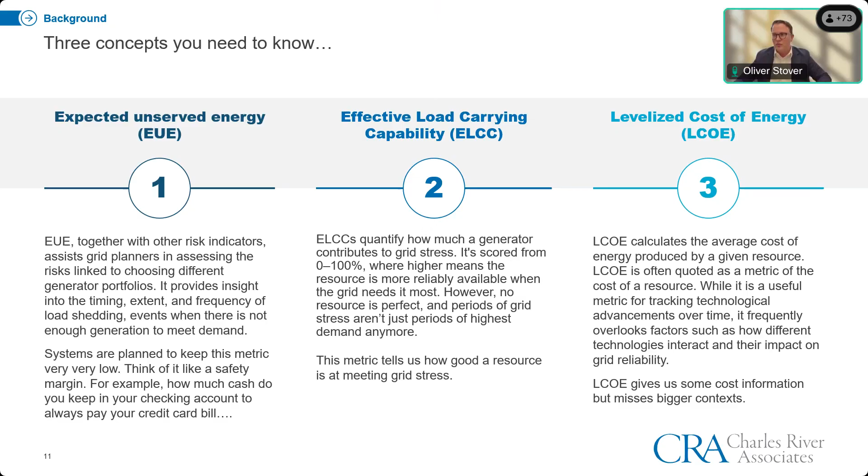Moving forward, the first thing we did when we performed our analysis is we wanted to just look around and see what public information was out there so that we could understand some of the New York dynamics when we looked at some of these challenges, especially the resource adequacy challenges facing the New York grid. So there's been some great work done by the New York ISO, if we look on the next slide, looking at some of the emerging challenges facing New York. And they have raised some concerns, along with many other markets across the country, that we're starting to see that uptick in reliability risks and that increasing risk toward winter.

So specifically, they've said, okay, starting in the 2030s, we're concerned about elevated load shedding, and we're really starting to see that risk profile shift toward the winter. And some key things that have been highlighted in New York studies, which have all been quite informative, is not only are we getting stressed, our neighbors on which we really benefited from trading with are also getting stressed. And specifically, most of the stress is overwhelmingly concentrated in New York City, as well as Long Island. So that's kind of the first data point that we looked at.

And when we looked at why New York was saying this, and jumping into the next slide, some of the concerns that were being raised as they did these studies is they specifically highlighted, well, New York kind of has a mismatch: a lot of the ability to build generation is upstate, versus all the load is concentrated downstate. And it can be hard to put new generating resources into those, especially urban congested zones.

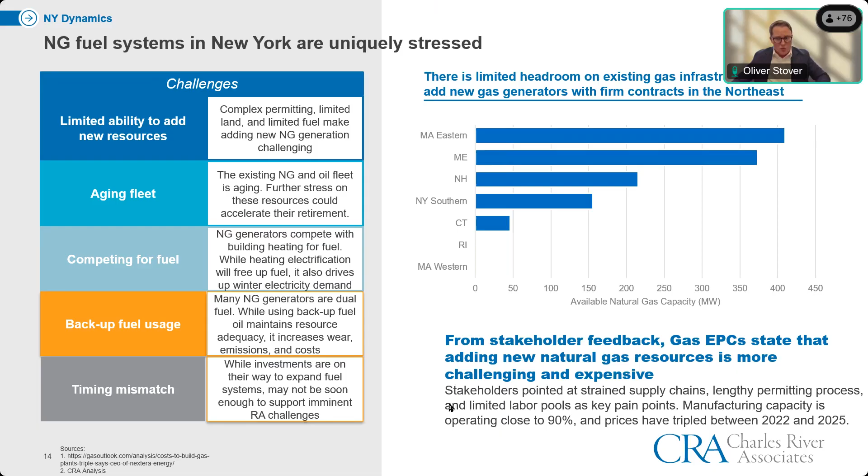We also looked at, if we go to the next slide, how is offshore wind being used in New York now? And we were able to evaluate South Fork Wind as an interesting case study to see how this has gone and how this resource has been used to harden and resolve resource adequacy challenges. Some themes that stood out to us: this is a relatively small system, somewhat isolated because it's on Long Island, and was recognized as having transmission constraints as well as fuel constraints. So it's this little pocket that's just a little bit hard to deliver to. So when the Long Island Power Authority put out a request to solve some of these issues, they specifically identified that this needs to be either a fuel-free resource or it needs to have liquid backup fuel because of some of the challenges delivering fuel to the system.

And that's how we've seen the offshore wind resource specifically here be used as this targeted intervention to solve some of these local problems and harden the existing infrastructure that was already there. This has been a consistent theme in the remainder of our work of the potential of how offshore wind can be used to resolve resource adequacy challenges, not necessarily purely as a replacement for existing infrastructure, but as a way to harden and augment existing infrastructure and get ahead of some of these fuel deliverability challenges.

The other thing that stood out to us is that this has a pretty decent capacity factor, 46%, quite high, especially when compared to other resources like solar. Certainly recognizing that it's a variable resource. They can't control when the wind blows, but when it does blow, it blows quite often, and specifically it blows often in the winter, which is a great way to harden and meet some of this winter stress.

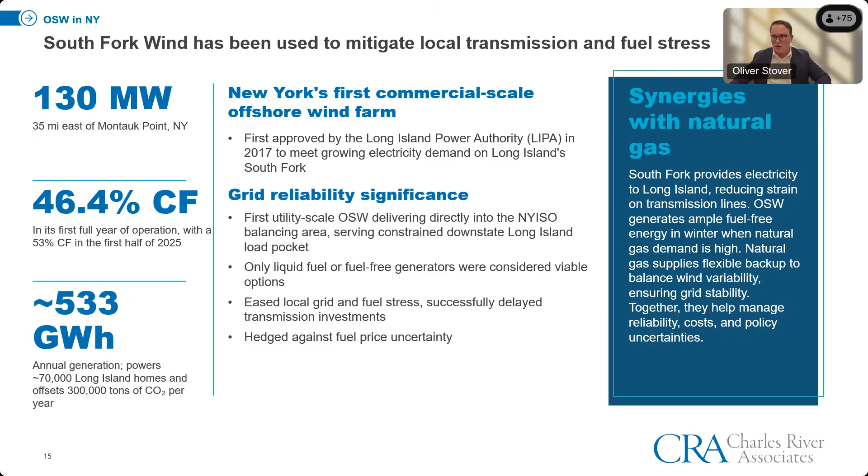The next thing we looked at on the next slide is, okay, what is the timing of the offshore wind and how could it potentially play a role? So what we found was that Atlantic-based offshore wind has this profile of quite high generation in the winter months with still material output in the summer, but a dip. We also found that because offshore wind can access higher wind, they're often taller, and they have the benefit of those coastal steady breezes, they often have quite a material benefit compared to their onshore alternatives.

And we also looked at how this benefit profile compares to, say, natural gas, recognizing that with some of our modeling capability, we can capture that natural gas has a temperature-dependent outage rate that's recognized nationwide and faces stress in getting fuel or has a slightly elevated outage when it's quite cold.

When we compared these three resources, the synergies were quite obvious to us. Natural gas had quite a bit of availability more in the summer and was able to meet some of those summer needs, while both onshore and offshore wind were the perfect augment, in that they had their periods of greater output during that winter when the natural gas system was more pressured, as well as being able to use the natural gas system to fill in any of those short gaps we saw in the winter.

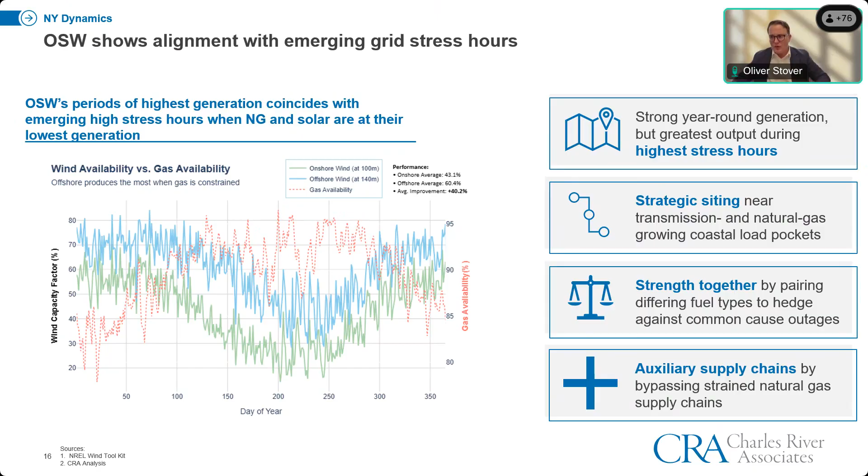Next, we wanted to really dive into what the markets are saying, especially in New York and New England. So specifically, we look through the lens of ELCC.

If we go to the next slide, that's that metric, that 0 to 100 metric, where the market is saying, okay, this is how much I think this resource can help me in solving grid stress. What this means is it's sort of saying, okay, this resource is, say, 100 megawatts, but I can count on maybe 10% of it in those grid stress, so I'm going to count it as a 10% resource if I theoretically replaced it with a perfect resource.

These are quite complex calculations, and especially for those motivated, it's worth spending time to understand them. But I'll leave this to kind of the A+ students. The key thing to know is that what an ELCC means is how much would this resource perform when compared to a perfect resource, specifically with solving grid stress.

they basically have said, well, now solar's done it. I'm able to generate during that period of time. I can meet demand. Okay, I've charged a storage resource. It discharges after the sun sets. And I've been able to solve it and really effectively help meet those historic periods of need. But now I've kind of shifted the problem later in the day.

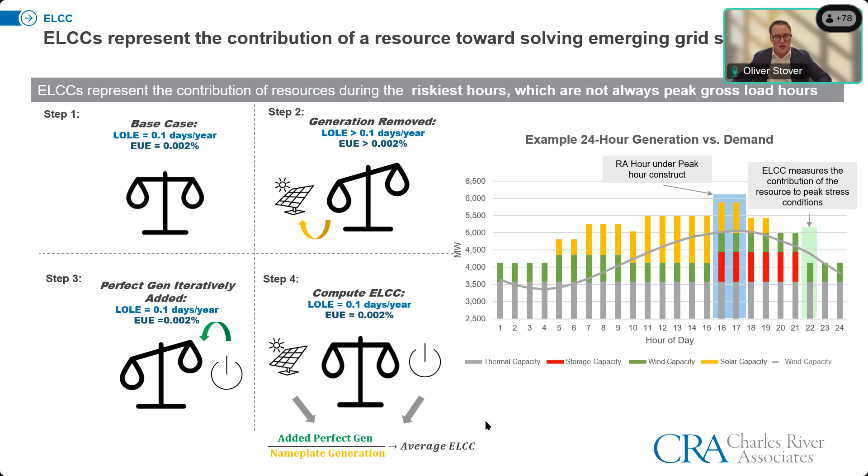When we actually looked at what the markets are telling us, if we kind of go on the next slide, New York's market, as it's put out its ELCC numbers, has increasingly said that offshore wind wins among renewables. This makes sense. It's got a higher capacity factor, it's got greater generation over all years, as well as that kind of key winter contribution.

However, of note, New York ISO is still evolving its ELCC accreditation. It's still a work in progress. And one of the things that they're fully working to capture is that stress on fuel systems, which is increasingly becoming a factor as folks are understanding stress.

So if we move to the next slide and look at what do other markets tell us and kind of what's the signal being put out there for offshore wind. ISO New England does do a really good job of capturing that fuel stress and can give us that more deep dive information of how offshore wind does and how it compares not only to other renewables, but more traditional generating resources.

And they also do something interesting where they look at multiple snapshots in the future and they say, not only at this level of offshore wind, but at a range of outcomes, what could happen. So they looked at 3 futures, one with quite high offshore wind investment and one with lower. And the things that stand out to us is that first tranche of investment in offshore wind is incredibly effective.

Its ELCC is quite high, and in fact, comparable even to a gas resource because it's really slotting in that period of stress. Even when the gas resources are stressed, because that's when offshore wind is quite effective, its ELCC is high. However, it shows that as we invest more and more, offshore wind, similar to solar, kind of becomes a victim of its own success.

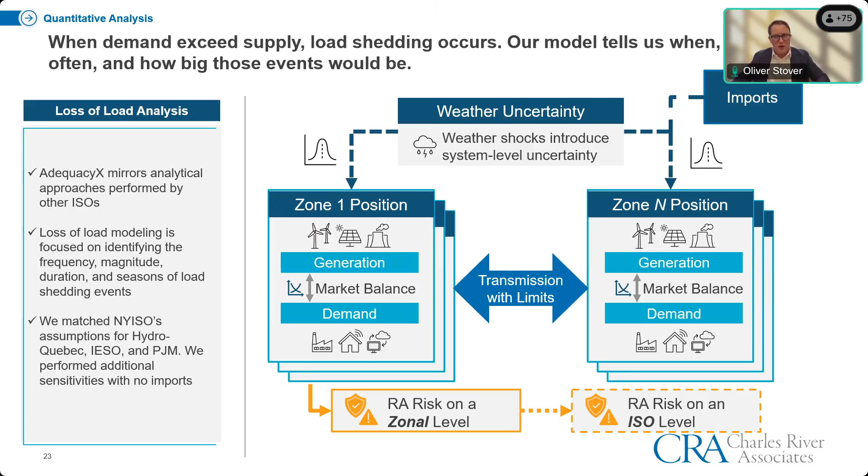And the next thing we did is we also tried to compare offshore wind to other technologies. We recognize on the next slide that it's not as simple as just saying, I'm going to pick this resource. It's really more saying, I'm going to pick this resource, but I could have also picked these resources, and understanding what role it plays and how it compares to its peers. And we hope to give information to help policymakers understand how these technologies play in a New York context and what is the right balance of resources that can help meet some of the emerging needs.

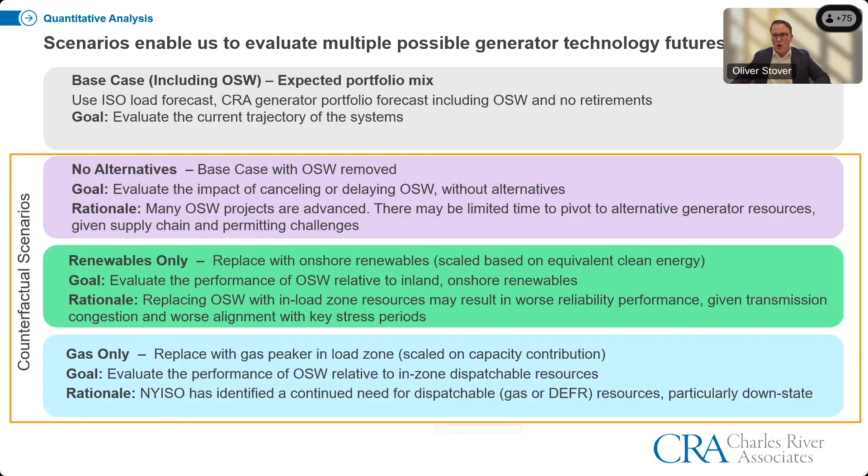When we actually got into our results on the next slide, one of the first things we looked at was potentially some of the stress on the fuel systems, recognizing that this is a key risk in the region, and how offshore wind could potentially help with some of these challenges. So we took New York ISO's load profile and added in electrification of heating and EVs, a critical part of what we recognize is happening in the future that New York ISO is projecting. And we looked at how much more stress this would place on the use of oil-fired resources.

While this is not a traditional risk metric, we think this is an important factor because using oil has a number of negative outcomes. Number one, it's more expensive than fuel-free resources or natural gas. Second, it increases the burden on your units. Dual-fuel generators are very reliable, it's a very effective strategy, but there is that slight uptick in wear and tear on the resources. So if we're running them more and more on oil, it could cause increased stress in the units, perhaps causing faster retirement than we would like for some of these aging resources.

There's also an emissions factor. These are higher emission fuels, so we want to understand that context. And lastly, there's a reliability factor. These often have limited storage on site, and as soon as they flip to that oil resource, the generator is asking to get refueled from trucks. So if we're on oil for a long period of time, it could create strain on the system across the board, as well as logistic headaches as I try to refuel that system.

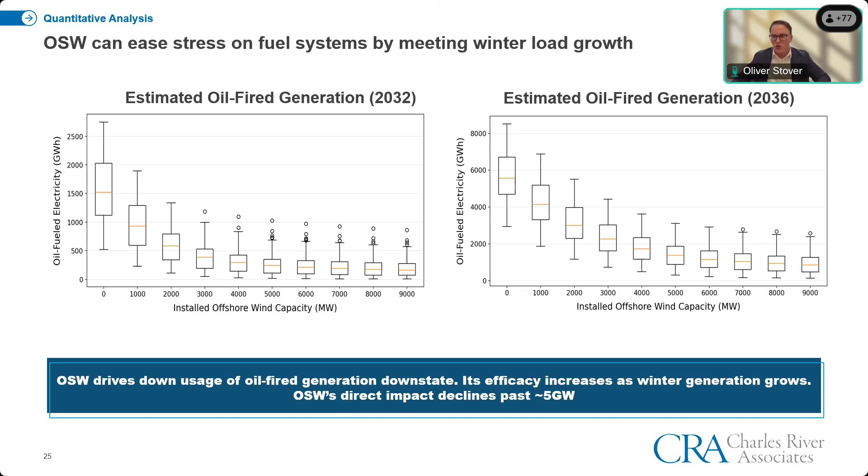We also very clearly see that declining benefit as well. That first tranche of investment is very effective. It really is the most effective per megawatt at driving down oil usage, and it starts to decline over time. We see a tipping point at about 4 or 5 gigawatts, well beyond the current tranche of investment, but perhaps important information as we look at how much of this resource makes sense, as well as the ability to pair it with other resources like storage so that it continues to have benefits beyond that initial tranche of investment.

The next thing we wanted to look at is how well offshore wind does compared to other technologies from a reliability perspective. The way to read these graphics is I looked at my 4 scenarios. Base case, current technology projection with offshore wind. No alternatives: what if I just canceled the wind plants and didn't build anything to replace them? Renewables only: what if I built only onshore renewables but put them out in New York, recognizing that I can't build an onshore wind plant in New York City? Or what if I replaced it with a gas plant within the downstate region? And we did this for 2032, 2036, as well as a sensitivity we'll discuss shortly.

When we looked at which 2 concepts performed the best, offshore wind and natural gas had equivalent performance. In fact, offshore wind was able to perform slightly better in this case, likely based on how we sized the gas plant and the technology we used. But really we found that it was able to recreate these reliability properties of the natural gas resource, specifically because it was in the most constrained zones, New York City and Long Island, and because it had that winter profile.

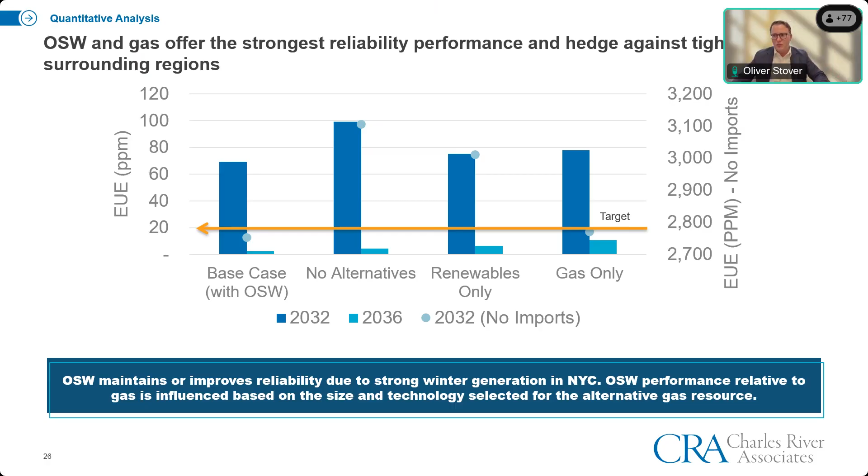And then if we go to the next slide, we looked at a number of metrics and tried to see how does offshore wind perform compared to other technologies. And what stood out to us is, like I said, offshore wind had a lot of the resource adequacy benefits of a dispatchable resource, specifically at that lower investment level. It was also able to drive energy prices down and emissions down, just like an onshore renewable resource would do. So it performed similarly there.

And then lastly, if we looked at the capital cost aspect of it, we found that whether natural gas or offshore wind was the most competitive really depended on a lot of context, like the investment level, as well as associated costs, like natural gas pipeline investments or transmission investments, which are slightly outside of the scope of our study and somewhere where we really want to go next as we look at how do you evaluate these resources and compare them in context.

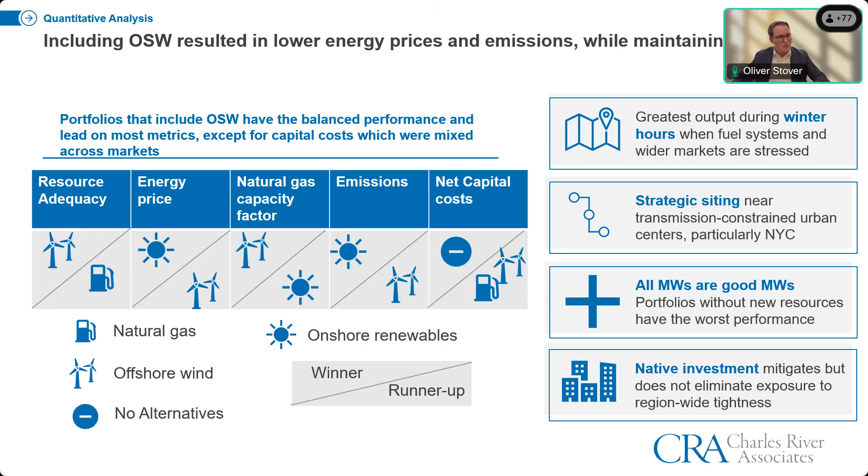And then if we get to the so what and what were the key themes, what we found overwhelmingly is there's no one path to resource adequacy. All megawatts are good megawatts, and all technologies can make sense in a context. And there are certainly benefits of offshore wind and risks. And we hope we found information that can help folks make informed decisions as they understand its potential role in meeting some of the stress.

First, we found stress is real. Just like most grids in the country, New York City is facing higher stress than it's seen in the past. Offshore wind sits in that role of having alignment with those stress hours, and it especially can be directly connected to those most stressed zones like New York City and be used to bypass some of these strained fuel systems. We also want to highlight that as folks make these decisions, we really think it's important that they look at the whole context and look at a portfolio as a whole, and make these decisions in a holistic way. Thanks. Happy to take any questions.

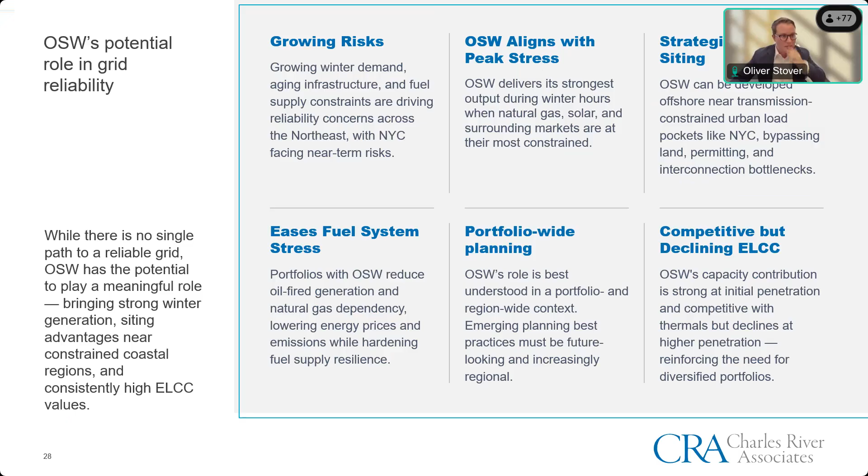So just starting off, Oliver, I think you touched on this a little bit, but can you describe the limits of your study and what questions still remain to be answered? Yeah, thank you. So one, as I briefly mentioned in the beginning, one of the limits of our study is we are really looking at general trends, offshore wind as a whole, rather than specific named projects. Same with natural gas.

We think it's really important, and where we'd like to go next is taking that next dive deeper of looking at this named project, this location. What would the transmission investments be? What would the pipeline upgrades be? We think that's really important in getting the full context. So as folks go next, and I know NYSERDA and New York ISO are doing this, really understanding that context of what is that level deeper of the cost and what are the associated implications to get that big picture.

Thanks. I think that leads really well into the next question we have, which is, what about transmission? Could that potentially replace some of the need for offshore wind or natural gas? Yeah, that's a great question. We certainly have found benefits for transmission. So specifically in our study, when we included the ability to import from wider regions, there's a huge benefit. Talking about orders of magnitude difference in New York City's load shedding risk.